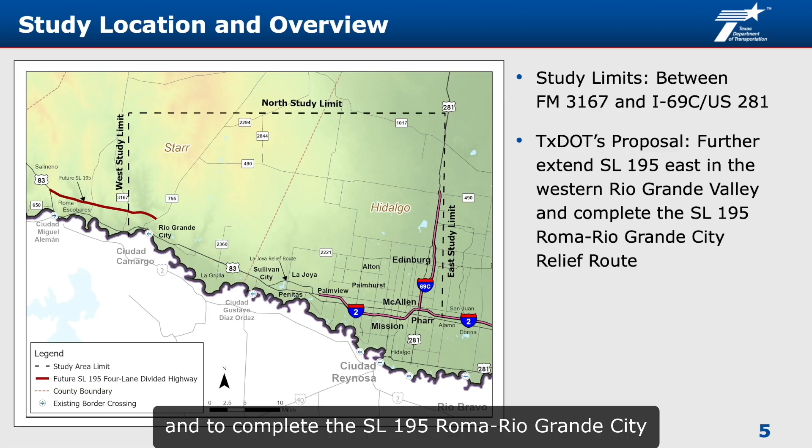The feasibility study limits extend between FM 3167 and I-69C US 281 in the western portion of the Rio Grande Valley. SL 195 between Roma and Rio Grande City, shown in maroon, has one section under construction and a second and third sections under development. TxDOT is proposing an SL 195 extension and connector to further extend SL 195 east in the western Rio Grande Valley and to complete the SL 195 Roma-Rio Grande City relief route, respectively.

The feasibility study is intended to establish the purpose and need for extending SL 195 further east to I-69C and US 281 north of Edinburg, and completing the SL 195 Roma-Rio Grande City relief route to US 83. It will identify key environmental factors that could affect where the SL 195 extension and connector are built, develop and evaluate route options to identify which ones should move forward for more detailed design and environmental study, and engage and receive input from stakeholders and the public.

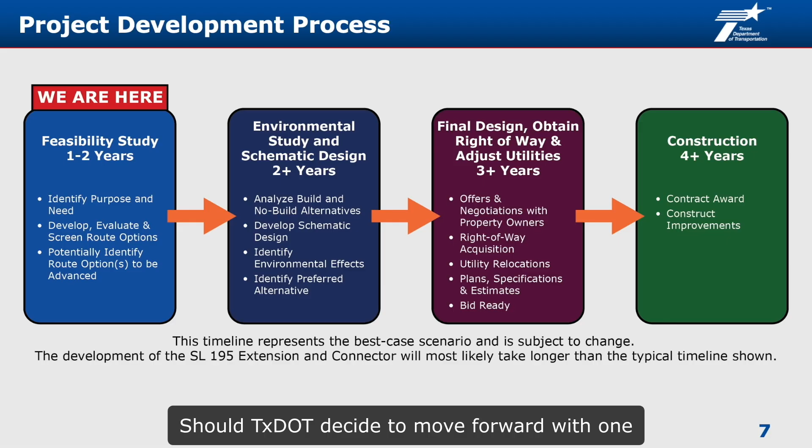The feasibility study is in the initial phase of the project development process. This feasibility study will identify and evaluate route options for the SL 195 extension and connector that meet the project purpose and need, minimize potential impacts, and reflect stakeholder and public input. Should TxDOT decide to move forward with one or more extension and connector route options, a multi-year process will begin. All phases of the project development include additional opportunities for public involvement. Advancement from step to step is contingent upon the outcome of the previous step and the availability of funding. The schedule for construction has not been developed at this time. This timeline represents the best-case scenario and is subject to change.

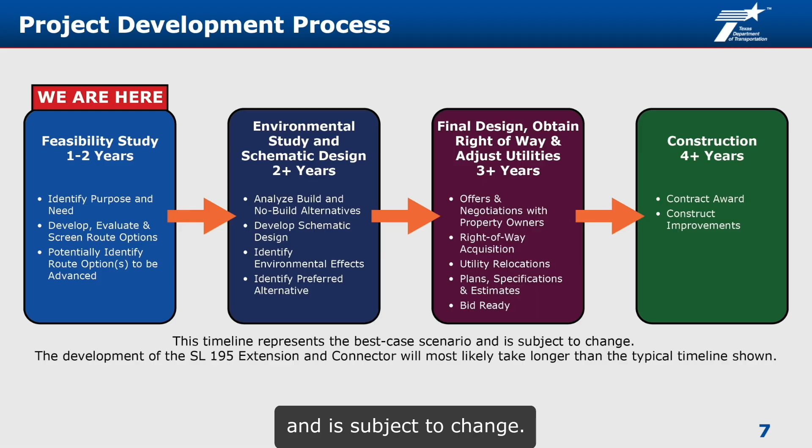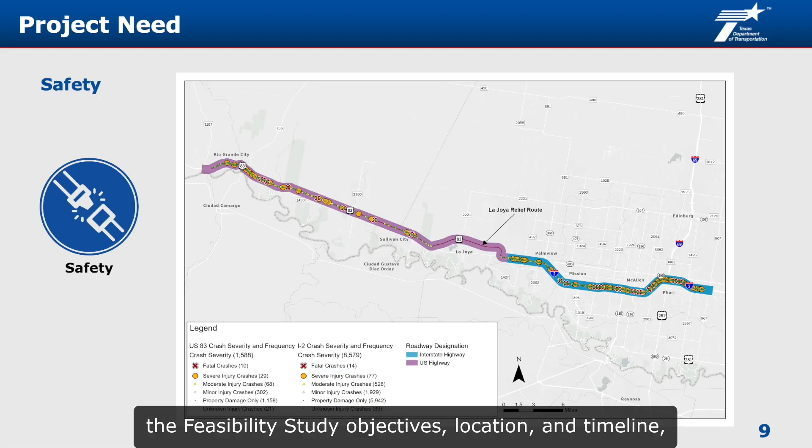As we transition from understanding the feasibility study objectives, location, and timeline, it's important to clarify why the SL 195 extension and connector are needed and review their purpose.

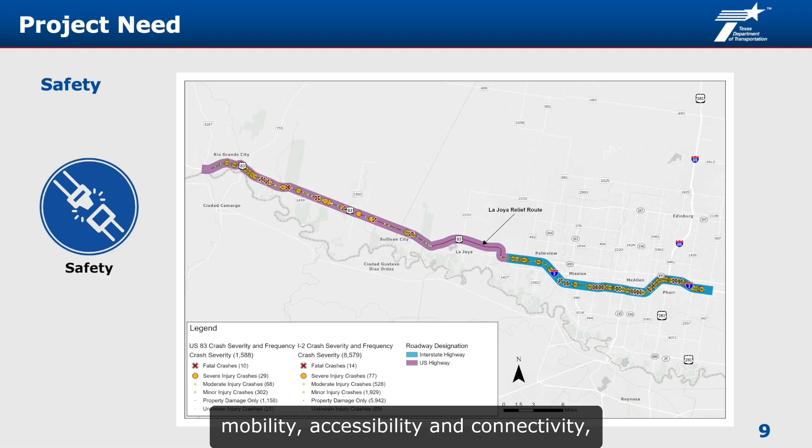The overall needs identified in the study area relate to safety, mobility, accessibility, and connectivity, speed, network redundancy and resiliency, and emergency evacuation. Let's start with safety.

Safety concerns exist along US 83 between Rio Grande City and La Joya and I-2 in the western Rio Grande Valley. These safety conditions are expected to worsen if no improvements are made.

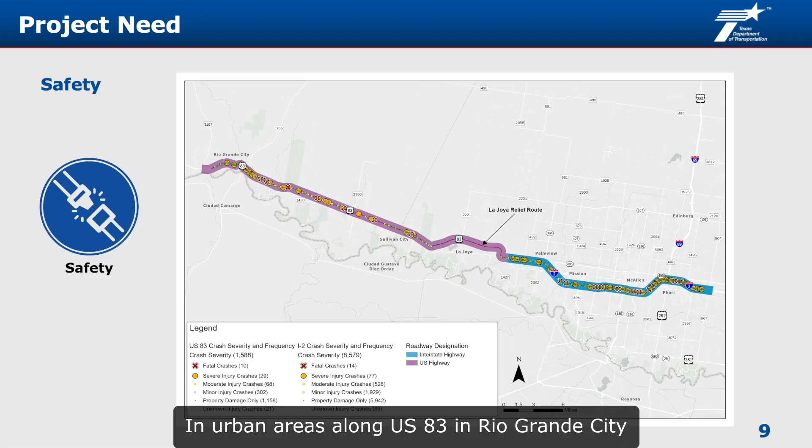From 2019 to 2023, more than 10,000 crashes occurred along these roadways, and nearly 3,000, or about 29%, resulted in injuries or fatalities.

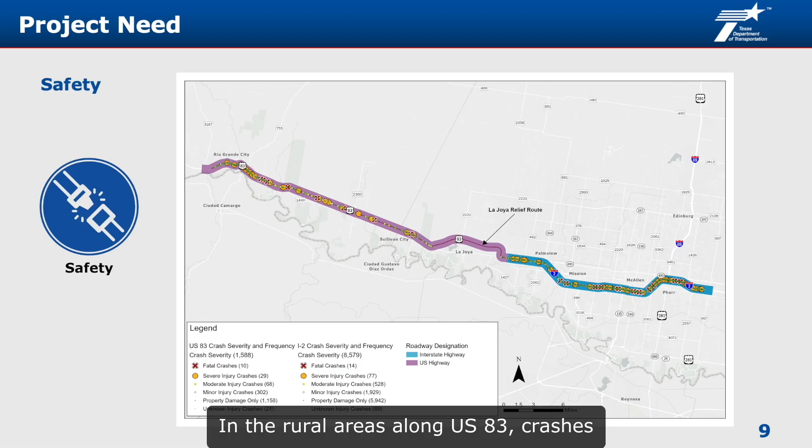In urban areas along US 83 in Rio Grande City and along the I-2 frontage roads, crashes are often linked to traffic congestion and driver mistakes, especially where there are many driveways or unsignalized intersections. In the rural areas along US 83, crashes tend to happen when drivers misjudge oncoming vehicle speeds, run red lights or stop signs, or follow too closely.

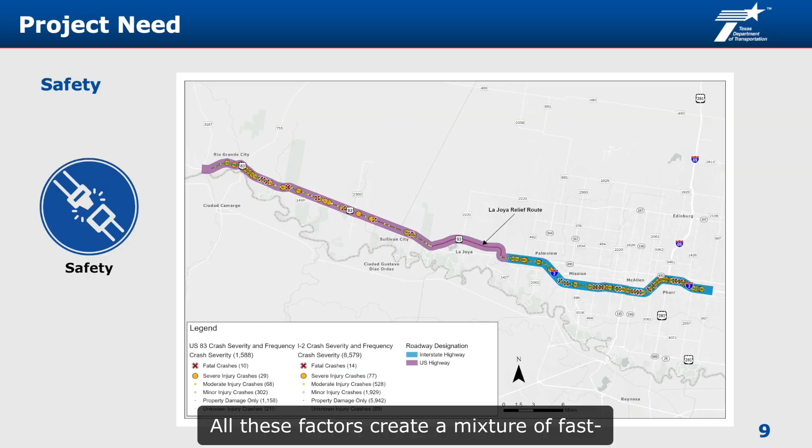All these factors create a mixture of fast-moving through traffic and slower local traffic. This speed difference makes it harder for drivers to react quickly and increases the risk of crashes, leading to higher than average crash rates compared to the rest of the state.

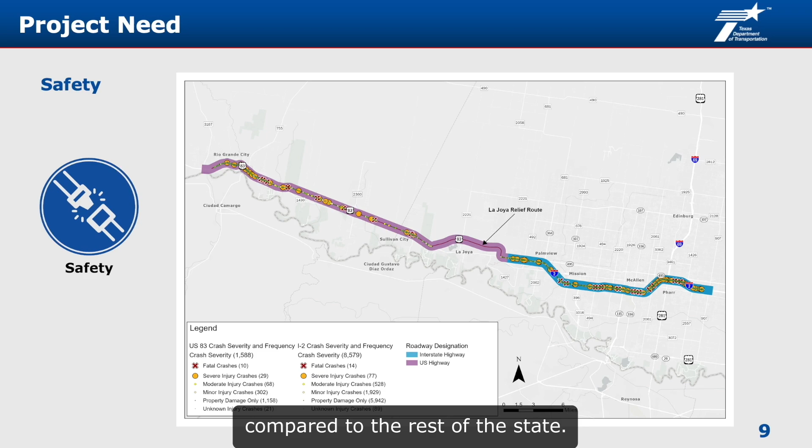The US 83 and I-2 corridor is the principal east-west route on the Texas Highway Freight Network serving the western Rio Grande Valley. This important corridor has traffic bottlenecks, congestion, reduced speed limits, and signalized and non-signalized intersections that adversely impact through traffic mobility, regional and local accessibility and connectivity, freight movements, border crossing connectivity, and emergency response times.

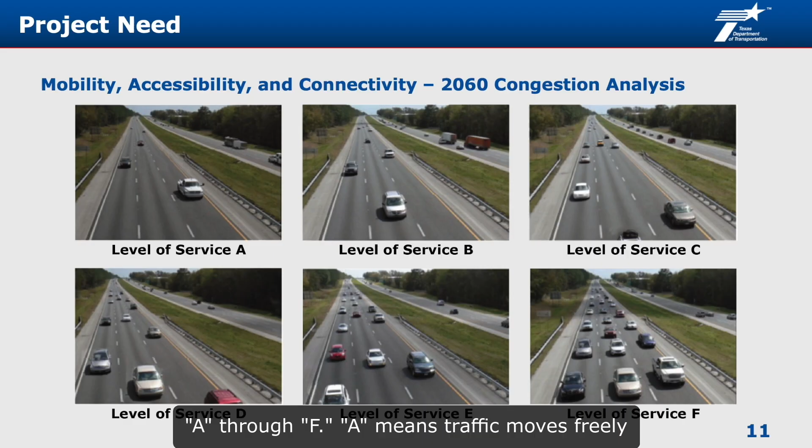A traffic study for the US 83 and I-2 corridor was conducted to evaluate the current and future levels of congestion. Level of service was used to measure the amount of congestion based on a letter grading system A through F. A means traffic moves freely, and F means severe congestion.

On US 83, congestion is mainly around Rio Grande City. By 2060, the eastbound lanes are expected to reach a level of service F throughout the morning rush hour.

On I-2, congestion will be worse at the signalized intersections along the frontage roads. By 2060, about 90% of those intersections are forecasted to operate at level of service E or F both morning and evening. On the I-2 main lanes, the number of roadway segments rated level of service E or F is expected to rise from 8% in 2023 to over 20% by 2060 in both directions.

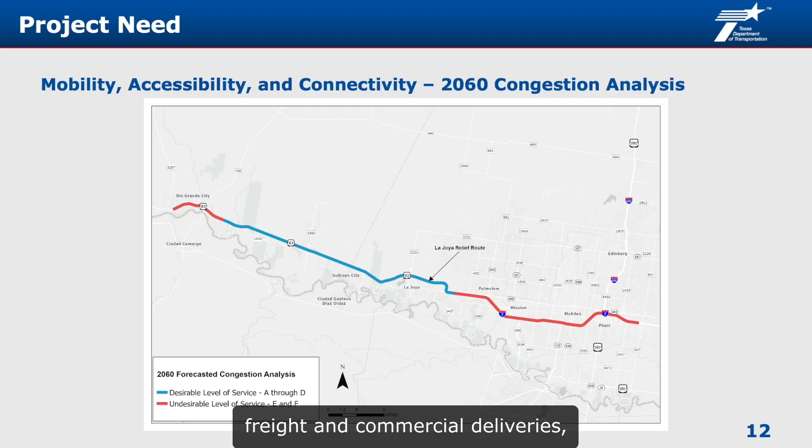Worsening congestion affects more than just commute times. It directly impacts regional and local travel, freight and commercial deliveries, border crossing connectivity, and emergency response times.

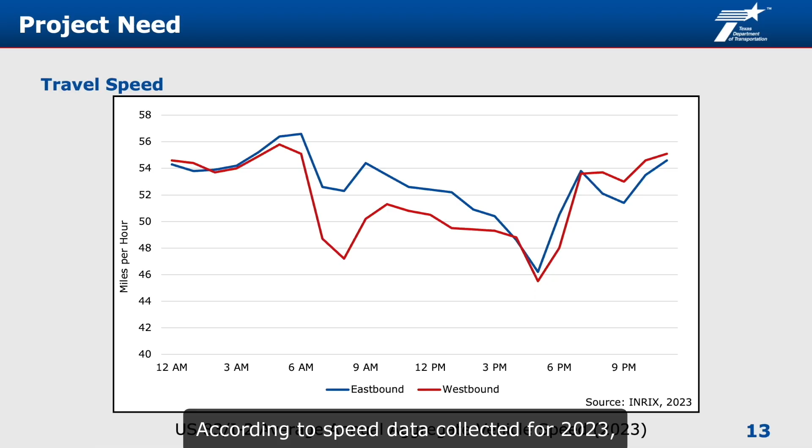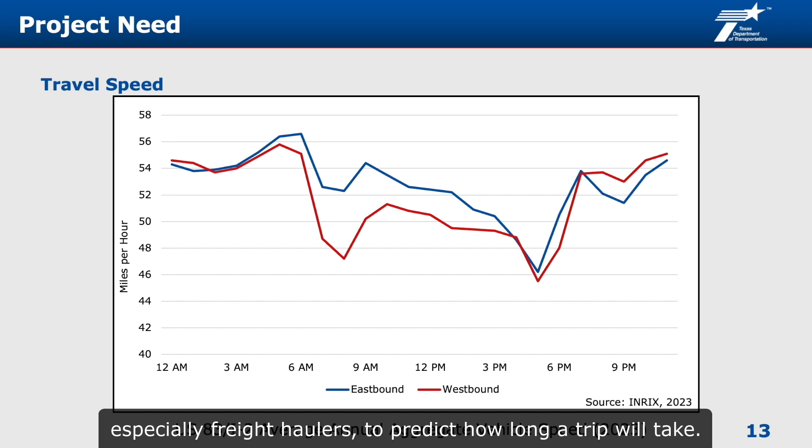According to speed data collected for 2023, the speed characteristics along US 83 and I-2 contrast with what would be expected on a high-speed corridor on the Texas Highway Freight Network. For instance, as shown in this graphic, travel speeds along US 83 and I-2 are inconsistent, which makes it hard for drivers, especially freight haulers, to predict how long a trip will take.

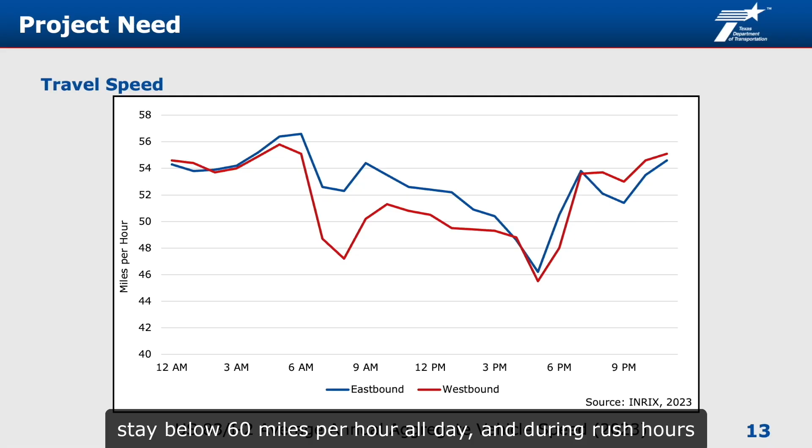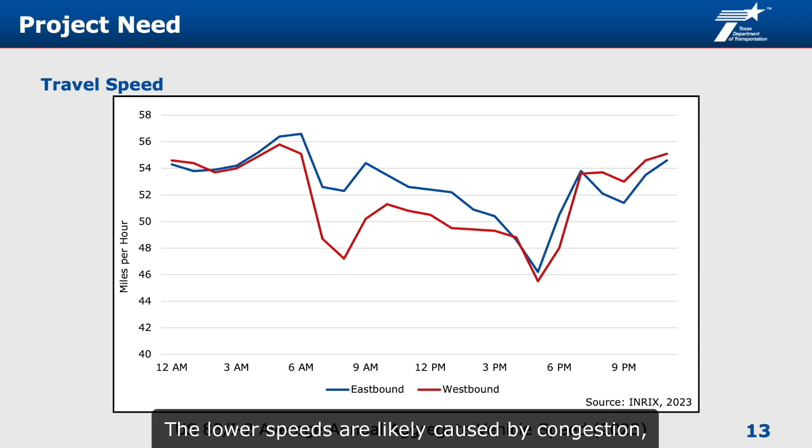This reduces travel time reliability, an important factor for moving freight efficiently. On average, traffic speeds stay below 60 miles per hour all day, and during rush hours, they drop below 50 miles per hour across much of the corridor. The lower speeds are likely caused by congestion, especially around Rio Grande City on US 83 and along I-2 and its frontage roads in the McAllen metropolitan area.

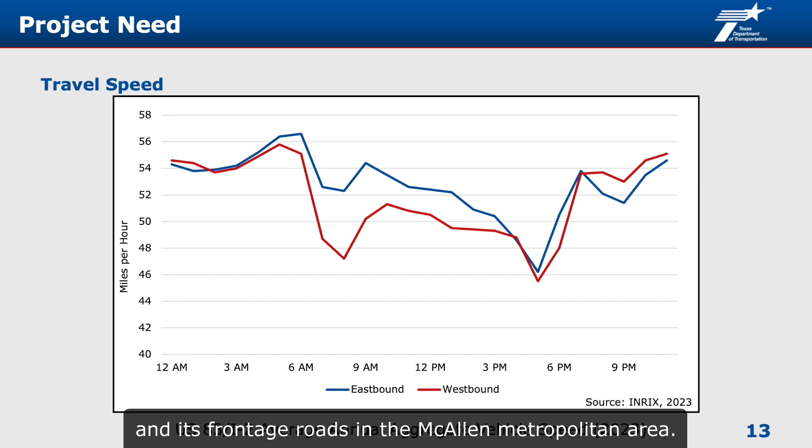Should an emergency, flooding, or closure disrupt the flow of traffic on US 83 or I-2, there are no other major east-west highways in the western Rio Grande Valley to move traffic, freight, or international trade. Furthermore, emergency responders who rely on US 83 and I-2 could face serious delays reaching residents and travelers during critical situations.

Because of this, the region currently lacks network redundancy and system resiliency, which means that if US 83 or I-2 are shut down, east-west travel in the western Rio Grande Valley could come to a standstill and take a long time to recover, thereby affecting freight, transportation, and disrupting international trade along the border.

US 83 and I-2 function in tandem as a major hurricane evacuation route, connecting coastal areas and the Rio Grande Valley population centers to inland destinations. Several maritime ports also link to this evacuation route.

Current and future traffic congestion, especially around Rio Grande City on US 83 and along I-2 in the McAllen metropolitan area, create bottlenecks that slow evacuation traffic. These delays could impact the safe and timely evacuation of about 1.4 million residents and tourists who depend on this route during hurricanes and other emergencies.

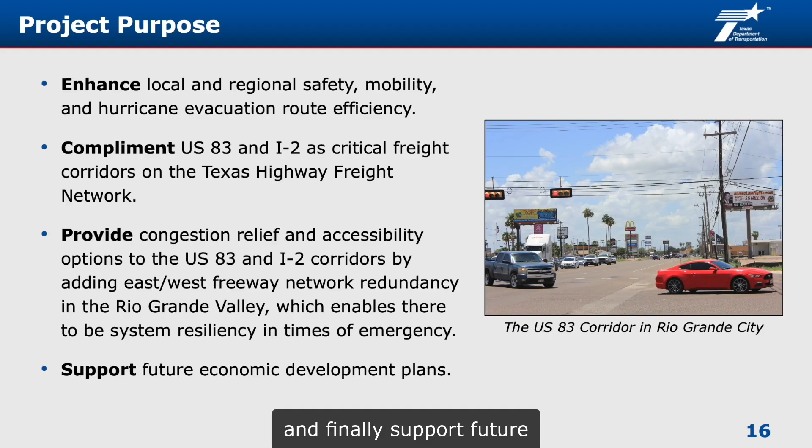It will relieve congestion and provide drivers with reliable, high-speed options to US 83 and I-2 that maintain the east-west flow of traffic in the event of an emergency or closure, and finally support future regional economic development plans.

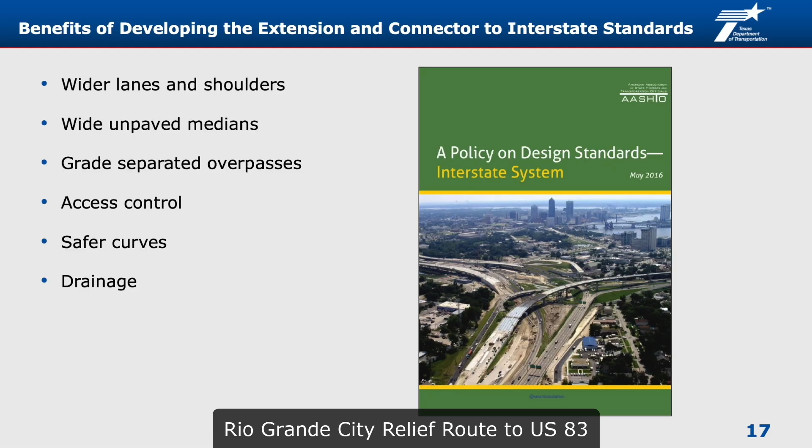What are the intended benefits of the SL 195 extension and connector? The SL 195 extension and connector are being developed to meet interstate standards and work together to create a new high-speed freeway from Rio Grande City to I-69C and US 281 north of Edinburg, as well as complete the Roma-Rio Grande City relief route to US 83 east of Rio Grande City.

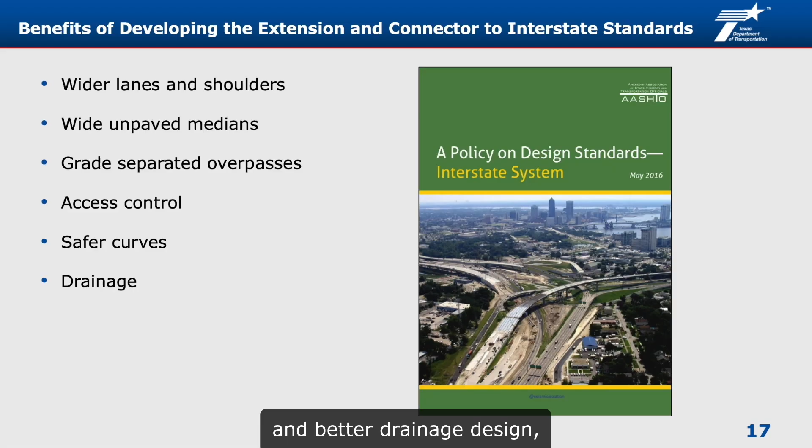The key safety benefits of providing modern high-speed east-west freeways that meet interstate standards include wider lanes and shoulders, giving drivers more room and better visibility; wide medians, which lower the risk of head-on collisions; overpasses and underpasses, which eliminate conflicts at intersections, driveways, and railroad crossings; controlled access, allowing vehicles to enter and exit the freeway more safely; gentler curves and slopes, improving visibility especially at night or in severe weather; and better drainage design, which reduces the risk of hydroplaning.

Extending SL 195 east to I-69C and US 281 will bring several major benefits to the western Rio Grande Valley. The new route will improve east-west traffic flow, lower the number of congestion-related crashes on US 83, and make it easier to reach Edinburg and connect with the broader McAllen area from the west, supporting local and regional economic growth.

The new freeway will strengthen the Texas Highway Freight Network by improving travel time reliability, regional connectivity, and access to international border crossings, helping meet the needs of freight carriers and trade partners. Also, in case of emergencies, flooding, or road closures on US 83, the extension will offer a high-speed alternative route, keeping traffic and goods moving safely.

By separating fast-moving through traffic and heavy trucks from local traffic, the extension will improve driver reaction time, lowering the risk of high-speed crashes.

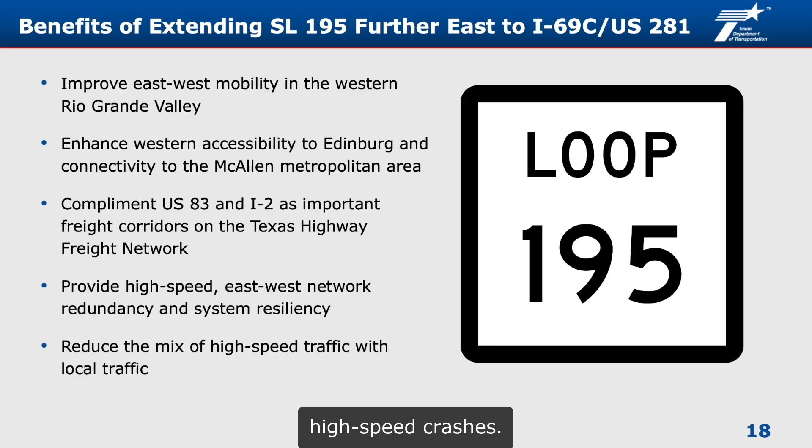Development of the SL 195 connector will complete the Roma-Rio Grande City relief route, allowing through traffic to avoid the densely developed areas of Rio Grande City. This new route will reduce congestion and increase travel time reliability along US 83, a key freight mobility consideration.

The connector will improve quality of life for residents by cutting down on emissions, noise, and heavy truck traffic in the heart of Rio Grande City. It will improve safety by reducing through traffic and lowering the risk of intersection, pedestrian, and cyclist crashes in the city, enhance local mobility and accessibility, helping people and goods move more easily within and around Rio Grande City, and support future economic growth and development throughout the region.

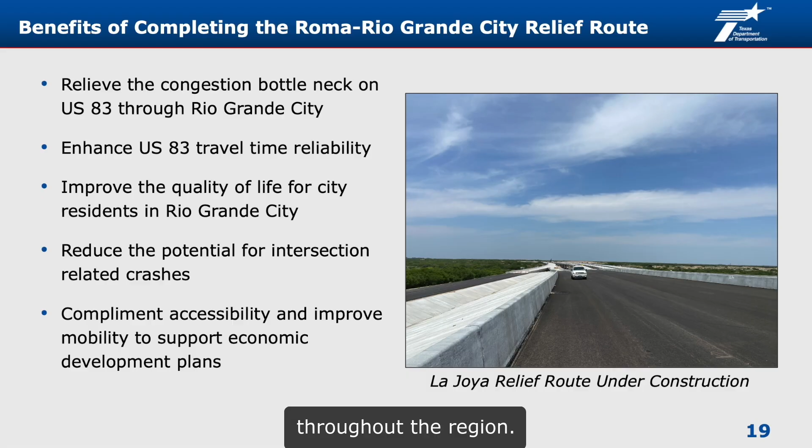As we move forward, the focus now shifts to presenting the SL 195 extension and connector route options that are proposed to work together to serve the existing and future travel needs in the western Rio Grande Valley.

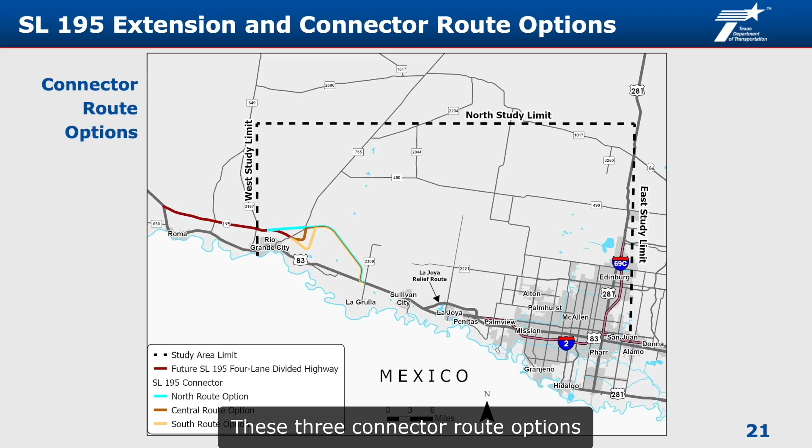There are north, central, and south SL 195 connector route options. These three connector route options overlap as they approach US 83. The SL 195 connector would complete the SL 195 Roma-Rio Grande City relief route to US 83.

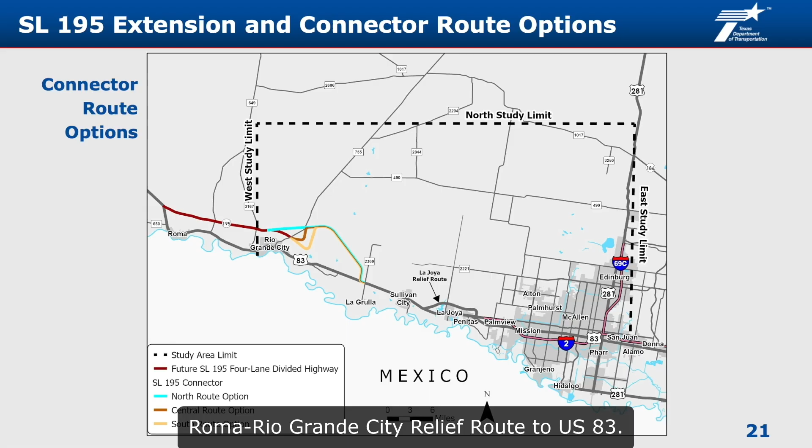Both the extension and connector route option development involved meeting interstate design standards, avoiding and minimizing impacts to residences, businesses, communities, and environmental features while keeping costs reasonable, and coordinating with regional and local leaders, including elected officials, regional planning representatives, and transportation entities to gather local needs and concerns.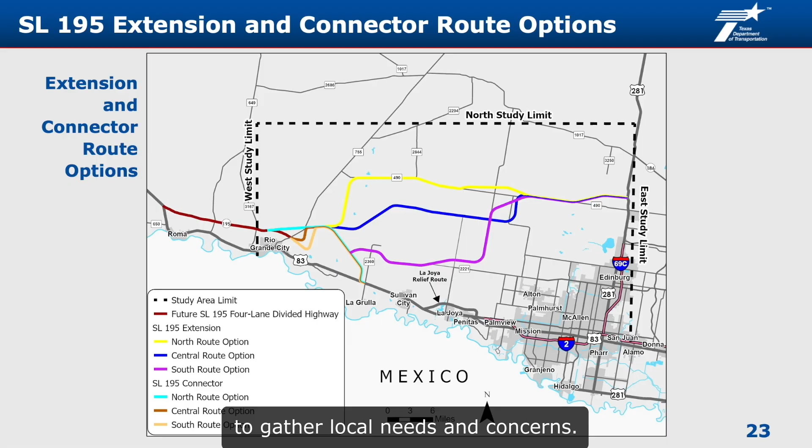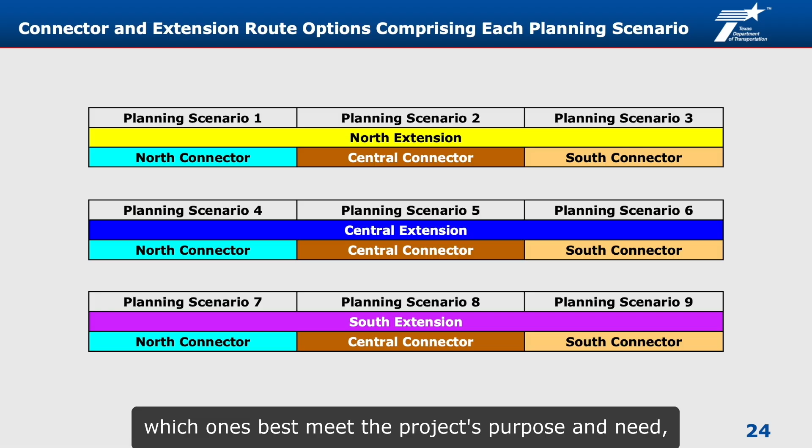The combination of the three extension and three connector route options form nine planning scenarios. They are being evaluated individually to determine which ones best meet the project's purpose and need, have the greatest opportunity to minimize impacts to the natural and human environments, and also take into consideration stakeholder and public feedback.

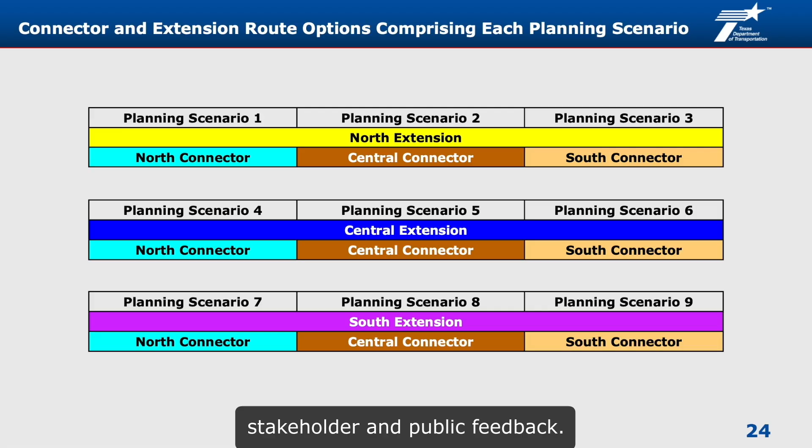The SL 195 extension and connector will likely be developed in phases over time.

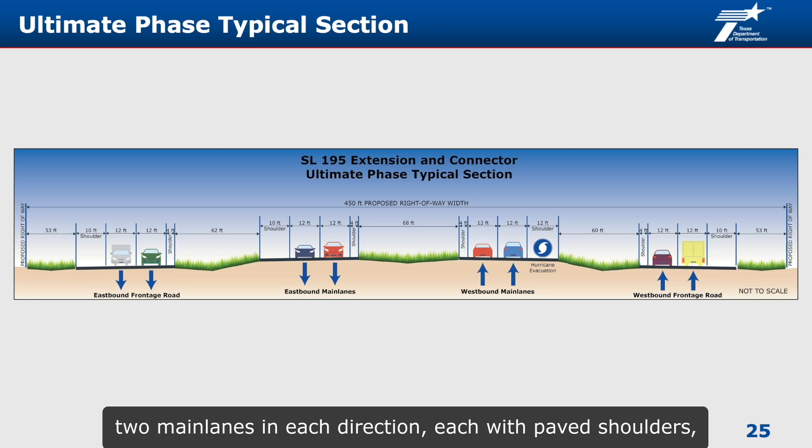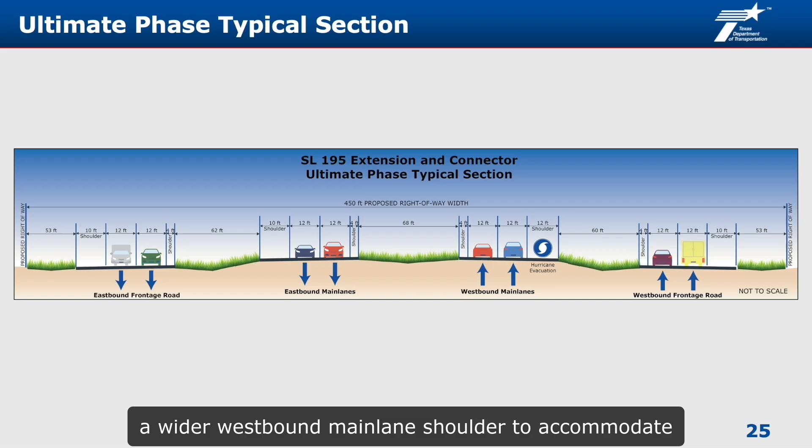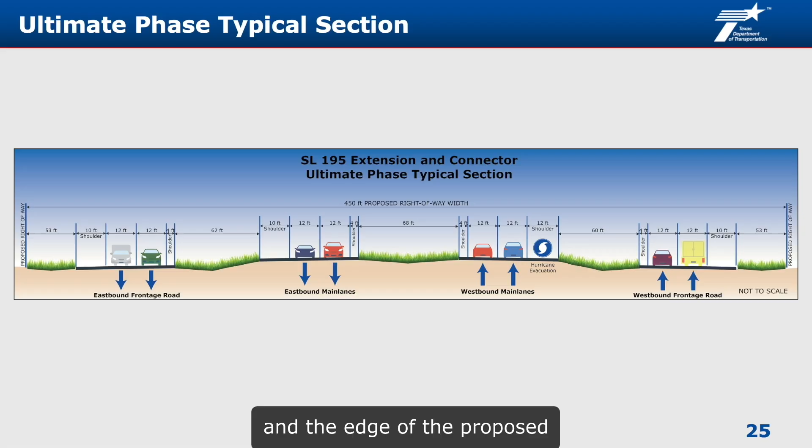The ultimate phase typical section would include 2 main lanes in each direction, each with paved shoulders, a wide grassy median, one-way frontage roads in each direction to provide access to local streets and properties, a wider westbound main lane shoulder to accommodate hurricane evacuation traffic, and space for shared use paths between the frontage roads and the edge of the proposed right-of-way, allowing for pedestrian and bicycle use. The typical section would require up to 450 feet of right-of-way width.

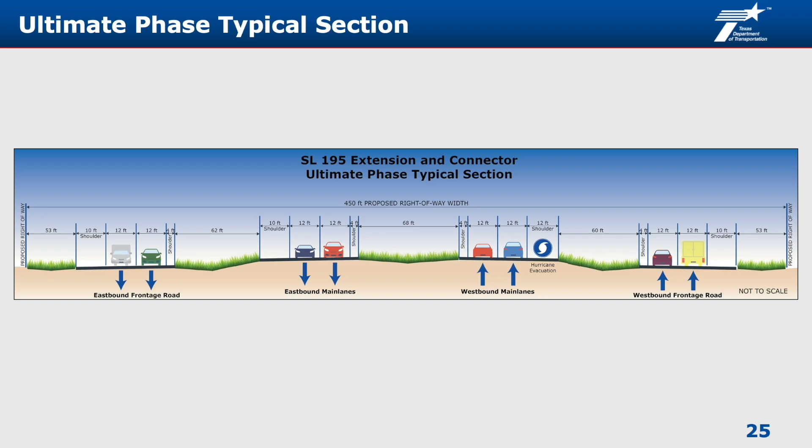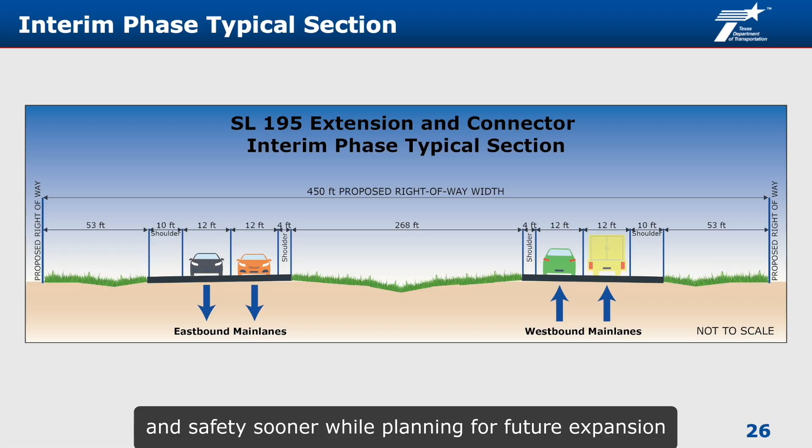An interim phase typical section may include the acquisition of the full 450-foot right-of-way to accommodate the ultimate phase freeway. Then, 2-lane frontage roads with shoulders are anticipated to be built first as funding becomes available. During this interim phase, the frontage roads would have at-grade intersections with local roadways. These intersections may be signalized or stop-controlled depending on traffic needs. Shared use paths for pedestrians and cyclists could also be added. This phased approach allows the project to improve mobility and safety sooner while planning for future expansion as additional funding becomes available.

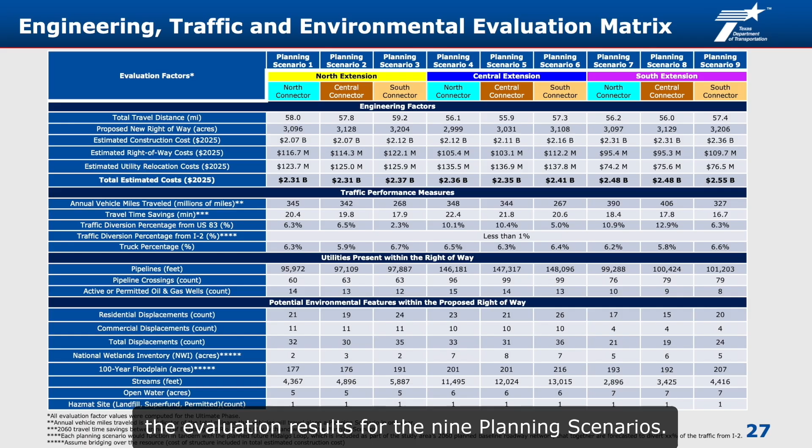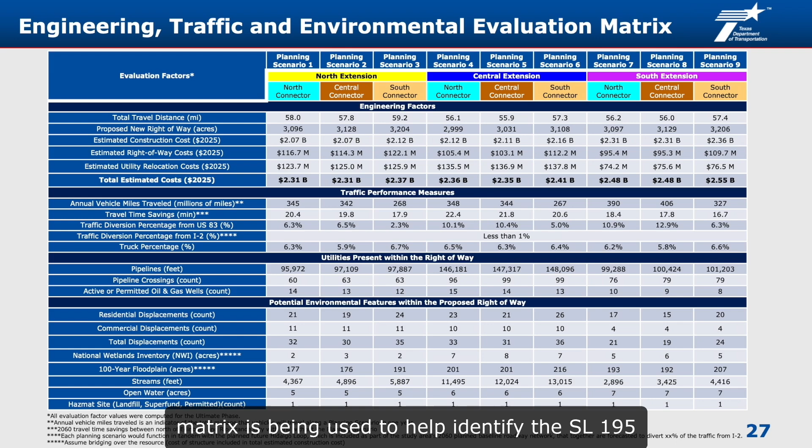An evaluation matrix has been prepared to present the evaluation results for the 9 planning scenarios. The engineering, traffic, and environmental evaluation matrix is being used to help identify the SL 195 extension and connector planning scenarios that provide the best balance in minimizing displacements and potential environmental impacts, serve the greatest number of trips and improve travel times, and have the most reasonable cost.

Please closely review this evaluation matrix in combination with the display maps presenting the 9 planning scenarios to assist TxDOT in identifying the planning scenario or scenarios that provide the best balance. Please let us know your opinions about these planning scenarios and the reasons for your opinions by filling out the meeting questionnaire. Please see the exhibit board file for the evaluation matrix you can see in greater detail.

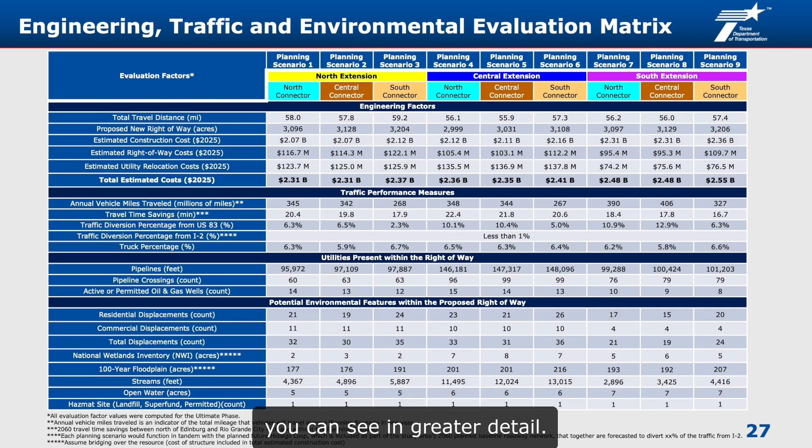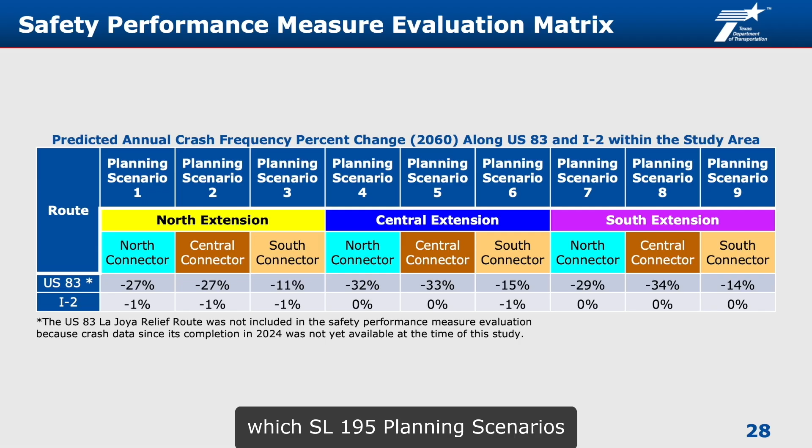Predicted crash frequencies in 2060, an important performance measure for safety, was also analyzed in the study. TxDOT recognizes that all vehicle crashes are of concern as they have a physical, financial, and emotional impact on people's lives. As such, a safety evaluation was conducted to predict which SL-195 planning scenarios may have the greatest impact in reducing annual crash frequencies along US 83 and I-2 within the study area in 2060.

Please closely review this safety evaluation matrix as you make your assessment regarding the effectiveness of the 9 planning scenarios and how they function to improve safety. Let us know your opinion by filling out the questionnaire. Please see the exhibit board file for the evaluation matrix you can see in greater detail.

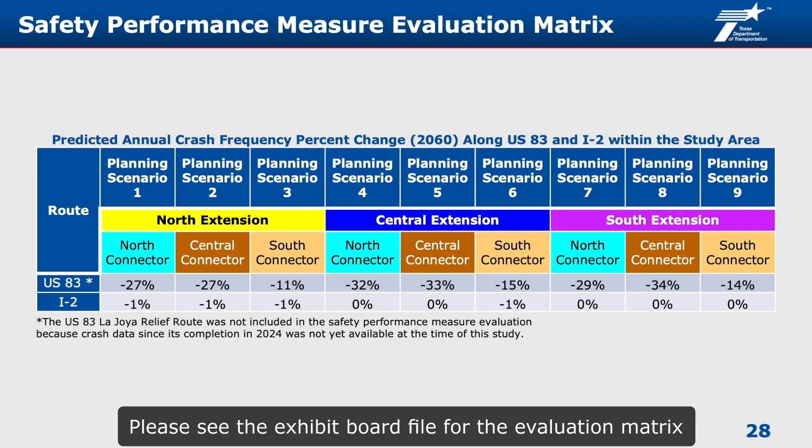Moving forward, TxDOT will review and respond to comments received during the public meeting comment period. They will also identify the SL-195 extension and connector planning scenarios to be advanced or dismissed based on the results of the engineering, traffic, environmental, and safety evaluations, as well as stakeholder and public feedback. In addition, they will complete the SL-195 Extension and Connector Feasibility Study report and post it on www.txdot.gov for public review. And they will use the findings from the feasibility study to begin the environmental study and schematic design phase as funding becomes available.

Each phase of project development will include additional opportunities for stakeholder and public involvement. The proposed phase transportation improvements may be further developed and advanced as multiple independent projects with unique schedules as funding becomes available. However, no decisions have been made regarding the development of independent projects at this time.

Your feedback is important to TxDOT. To be included in the official study documentation, all comments must be received or postmarked by Monday, January the 12th, 2026. Comments may be provided in person at the public meetings, by email sent to PHR_SL195_extension@txdot.gov, by postal mail sent to the TxDOT Pharr District, attention Edward Paradise Jr., 600 West Interstate 2, Pharr, Texas 78577, or online at www.txdot.gov, keyword search SL-195 Feasibility Study, and completing the online comment form.